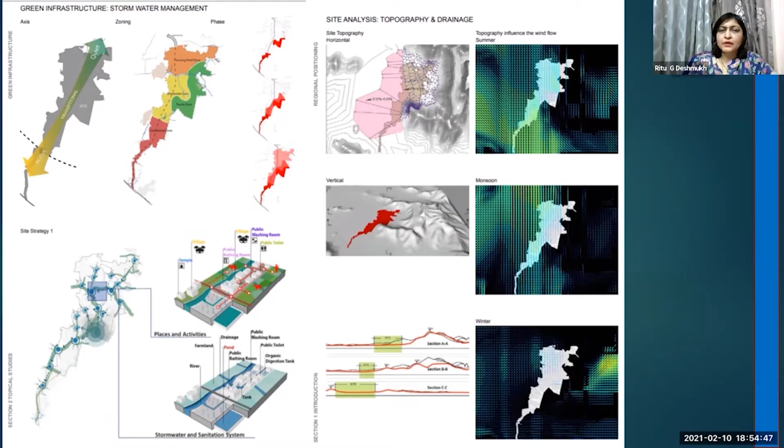The whole approach taken was more about understanding the site, giving sustainable solutions, giving a new kind of language to the built environment that is created. I'm highlighting this because it created a kind of dialogue between what people want and what profitability the builder can achieve, through creating an intermediary approach towards bridging the gap between academia and profession.

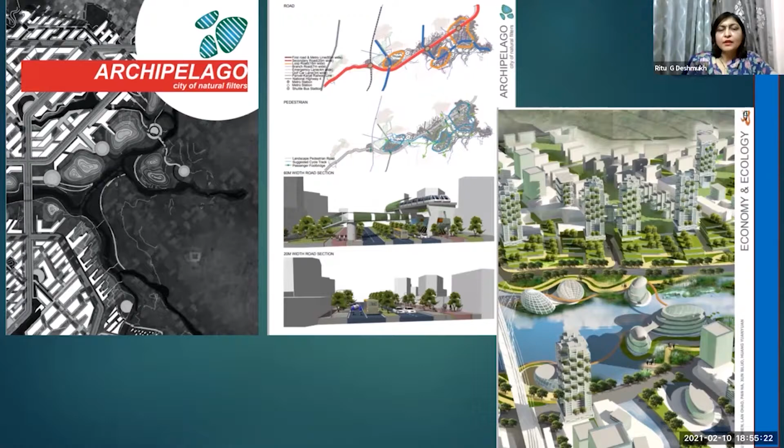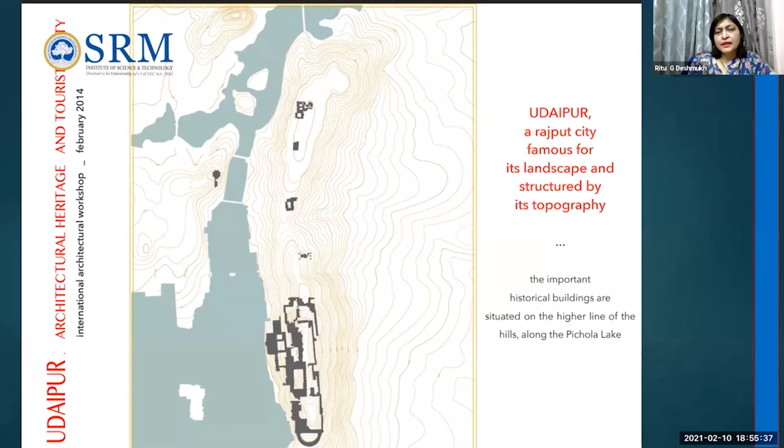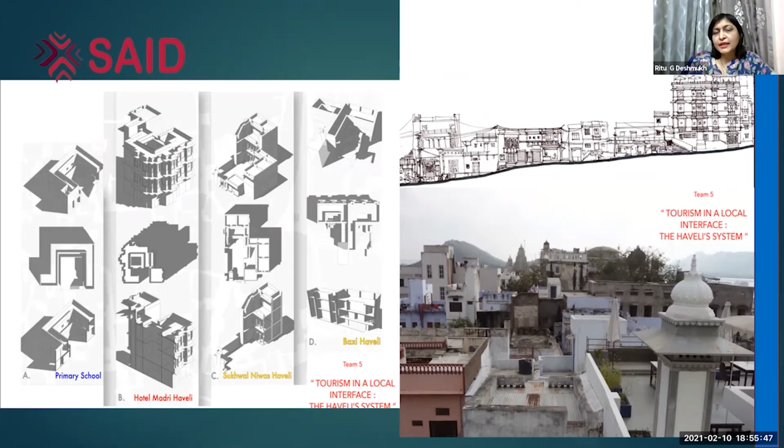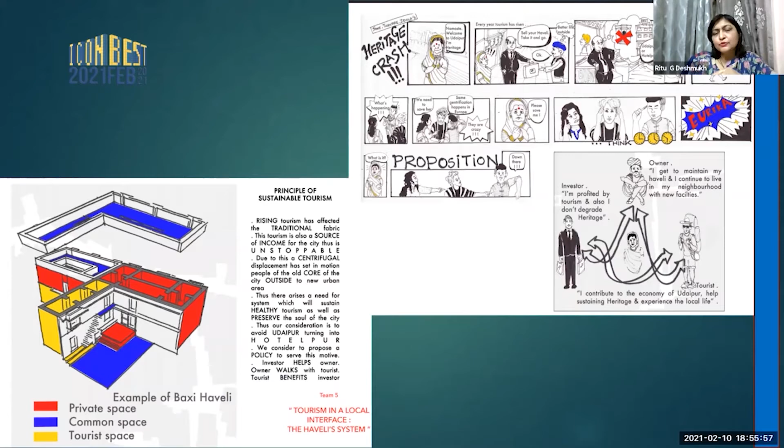The other examples are more academic oriented, but also give certain other solutions. This is a study in Udaipur which we carried out, which has hundreds of years of history. We tried to address two issues here. One was tourism in a local interface - how do you create possibilities of tourism in the old area of Udaipur, which does not have many tourists coming in, since tourists basically concentrate on the historic or monumental structures.

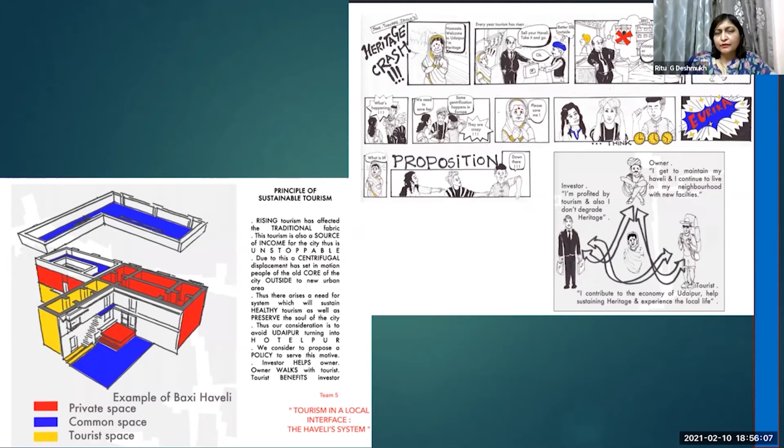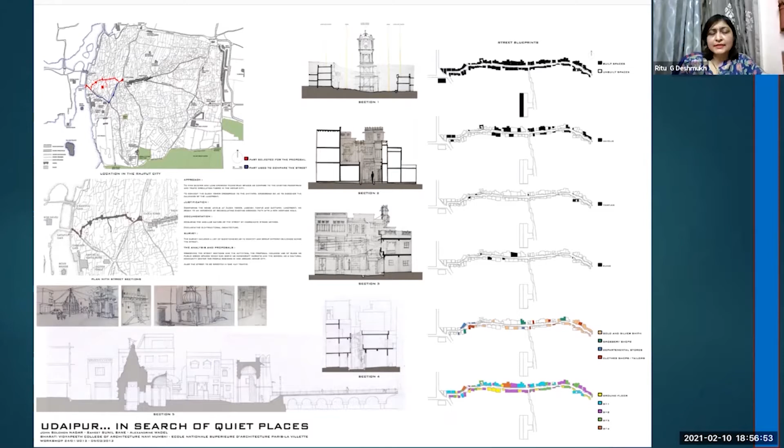So this was an attempt to make a dent into that aspect. The other effort we took was to curate heritage walks or touristic walks aligned to particular issues. For example, this particular walk is about searching for quiet places in Udaipur. People interested in exploring the old city core can take this walk, with pause areas and elements which are not part of the monumental city. These are all the examples I'm trying to show you here.

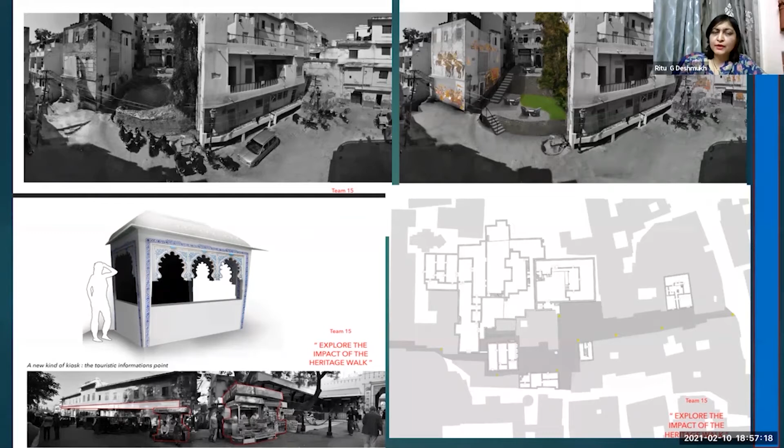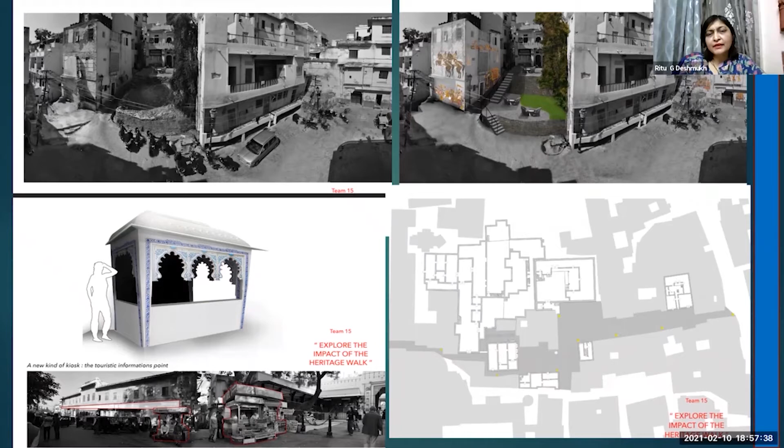This is the kind of intervention the students had proposed. You can see it's a very minimal approach to making a difference to the habitable space of the people there. The idea was to sensitize students to understand that inclusivity or sustainability is not achieved only by demolishing and building new. You can also do this through an inclusive approach of understanding what the people there want, and giving an intervention which helps their habitable space and improves their quality of life.

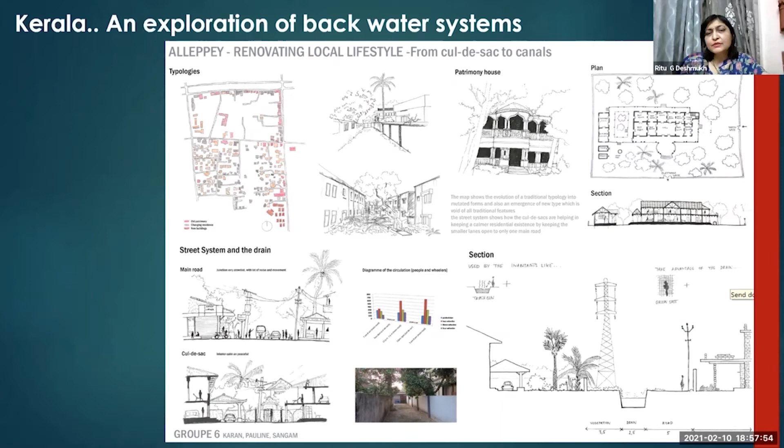Now, this is another example from Kerala, the city of Alleppey, best known as the backwater city. Here we were trying to understand the backwater systems, and we were trying to compare this particular backwater system to Quilon or Kollam, which has lost its backwater system.

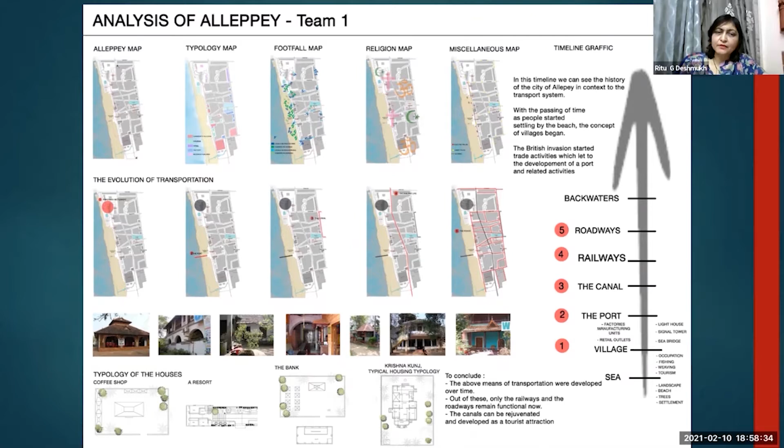There was a thought, when we had gone to this place from the government side, to connect Alleppey with Kollam through backwaters. So that was something we were trying to explore—to understand this backwater system, what is happening to the people living along it, and what changes they are facing. This is again part of learning from Indian cities and exploring new landscapes and engagements, coming up with solutions that are very nominal but make a lot of difference to the people out there.

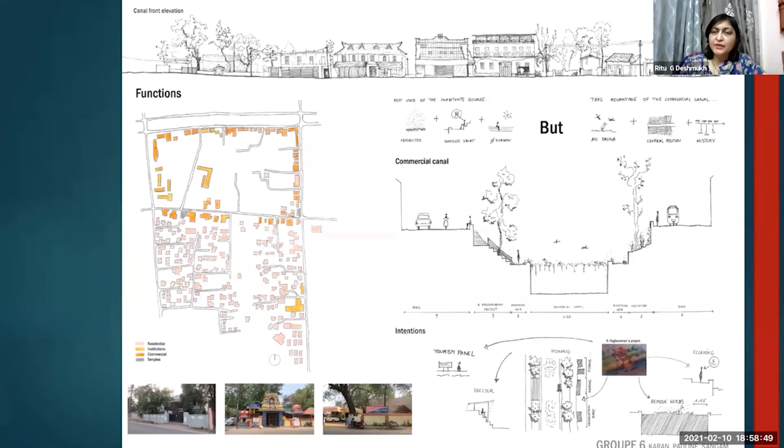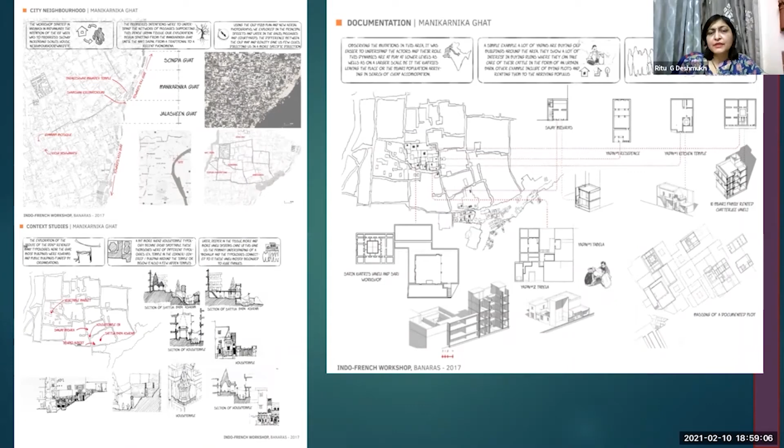So these are some of the solutions which were given. This is the third city I am sharing with you, which has a historical background—Banaras. Here we had done the study of the ghats, the neighborhoods, and the crafts or skills of this old city of Banaras.

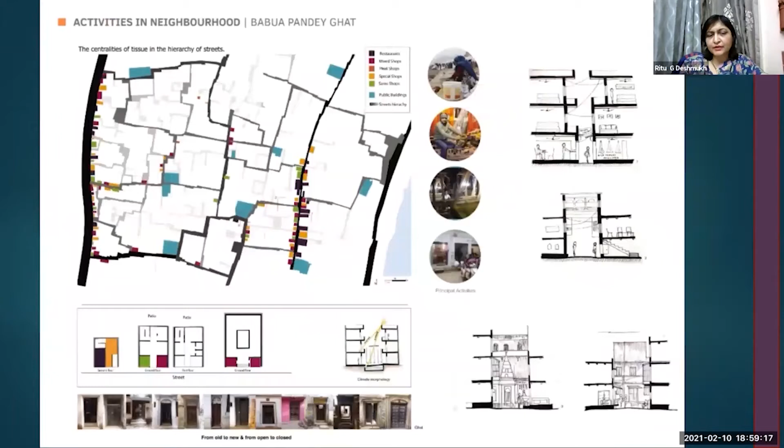As you are aware, it is also declared as a smart city. So now this aspect of people and the kind of engagements they are currently having is sort of kept aside, and there is an overlaying of smart city concepts on the traditional city. So there is a huge confusion and a huge gap about what is the sustainable solution to this, what kind of inclusiveness we are looking at when imposing such ideas onto our built environment. Can there be a way of being sensitive to the requirements of the people?

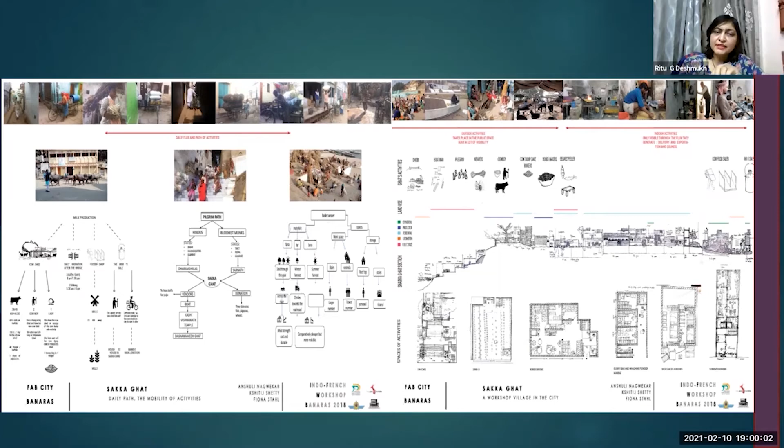Just one example I would like to share is the aspect of tourism. You might be aware that Banaras is very renowned for religious tourism, especially on the ghats of Banaras and the Kashi Vishwanath temple, which has a huge history. This is part of the reason why Banaras is known for what it is.

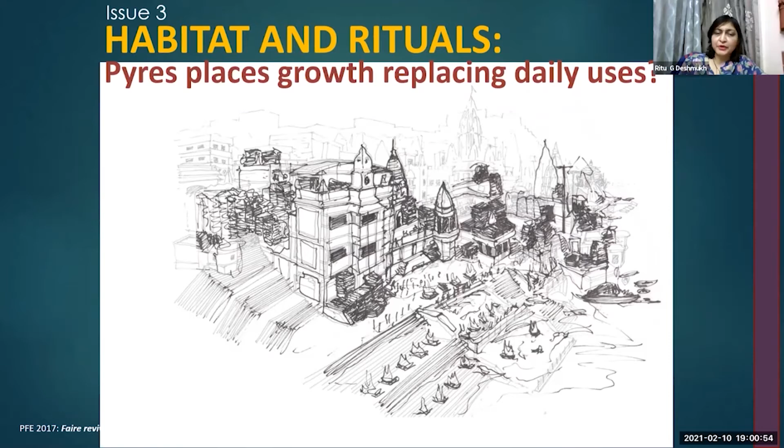The second thing why people come there is for moksha. It is believed that they will achieve moksha if they are cremated at the Manikarnika Ghat, the 24-hour burning ghat in Banaras. The third reason why tourists come is the water body, the Ganges, which is considered very sacred and revered in our mythology and religion.

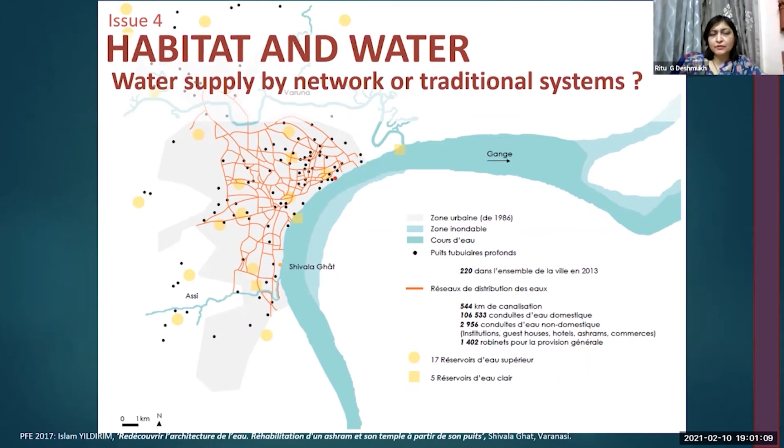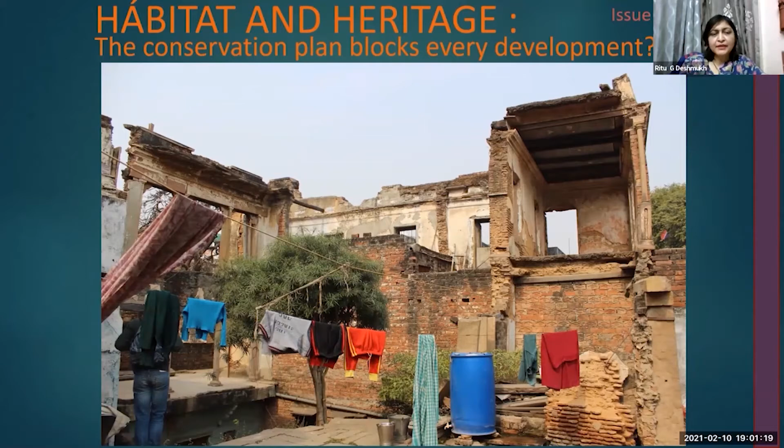This is the condition of the heritage there currently, which is not well kept or maintained, which has a lot to offer, but we are currently engaging in activities like smart city—technology-driven solutions to human habitation. This is one example of what happens because of proposals given by the government without understanding the desires and aspirations of the people.

So these are the things being proposed—removal of the dhobi ghats and the cows from the city. What impact will this have on this particular area? All that has to be understood. That is what inclusivity means—that you are not throwing off things which you think are redundant or an eyesore, or which you think will not cater to the tourist population.

This is something many foreign tourists have shared with us—that they enjoy the way Banaras is currently, and they enjoy the way the cows are part of the ecosystem, part of the city, part of the way of life of people. They also enjoy the way the dhobis use the water bodies around and create activities around the river Ganges.

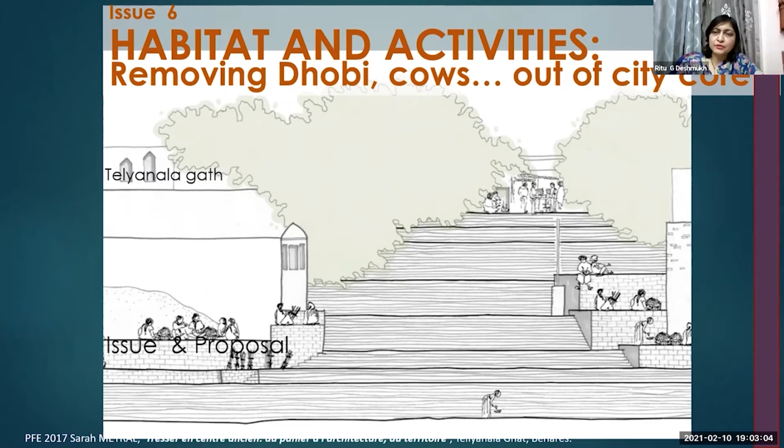Of course, when you propose certain changes, there are pros and cons. So whatever you propose has to be in sync with what is sustainable. You could always give solutions that are conducive to including these marginal sectors as well. So here I would like to share with you certain proposals which have been given by the students.

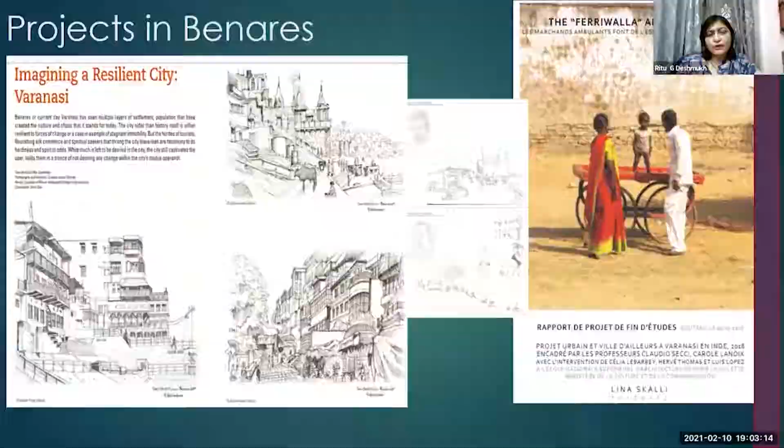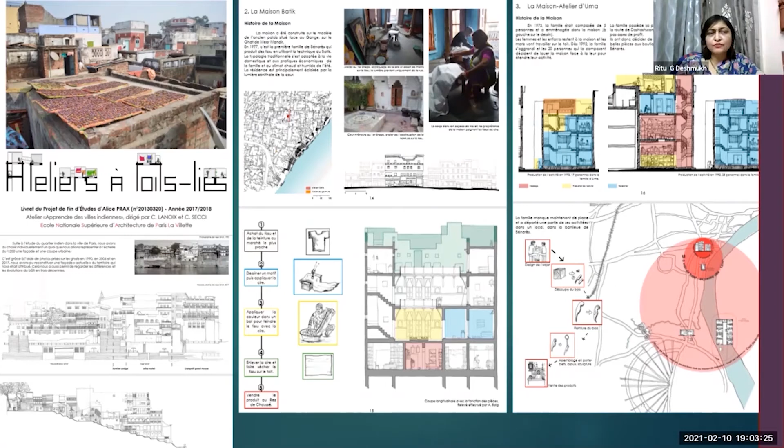So this is one of the proposals which is linking the terraces and promoting the skills of Banaras. This was a very nominal proposal, but it makes a lot of difference to the people out there because they don't have the opportunity to shift from this area to another. They will be part of this old area and sustain in the occupation and habitable spaces where they are living today.

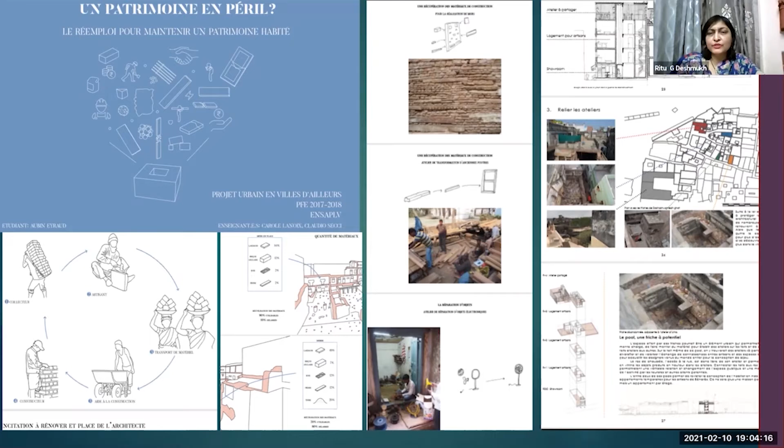The second solution or idea was, as I showed earlier, examples of how heritage structures are dilapidated due to loss of maintenance or nobody to take care of them. So there is a proposal by a student of recycling these heritage materials and creating a pool of materials which can be reused in the old city itself. These are again ideas which can be implemented.

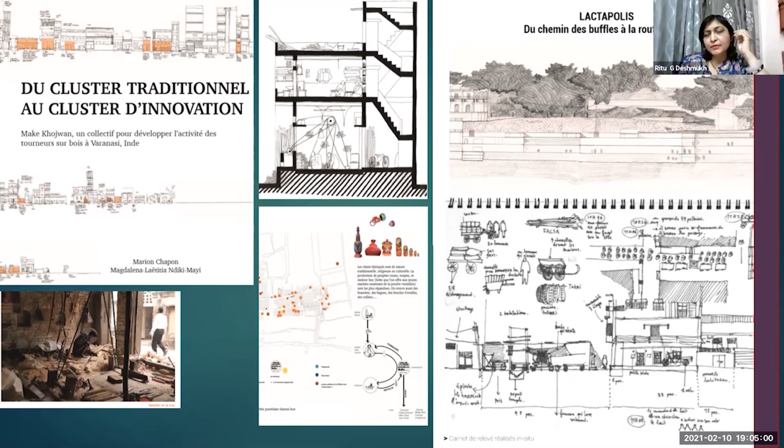There is another idea about the cows and the milk produced from them, because Banaras is known as the milk city. As I mentioned, there was a proposal that the cows have to be shifted outside the city, but when you do this, you are basically removing the essence of the city. So this was a proposal by students as to how the cows can be part of the city, but not disturb or hamper the touristic value of the city, and still produce milk and milk products for the city continually.

So all these are examples which we have been trying to inculcate in students, bringing out the idea that people and place are equally important, and this idea of sustainability is also related to including people and understanding their value systems, beliefs, and aspirations, rather than putting a blanket idea as architects of how we envisage the place to be.

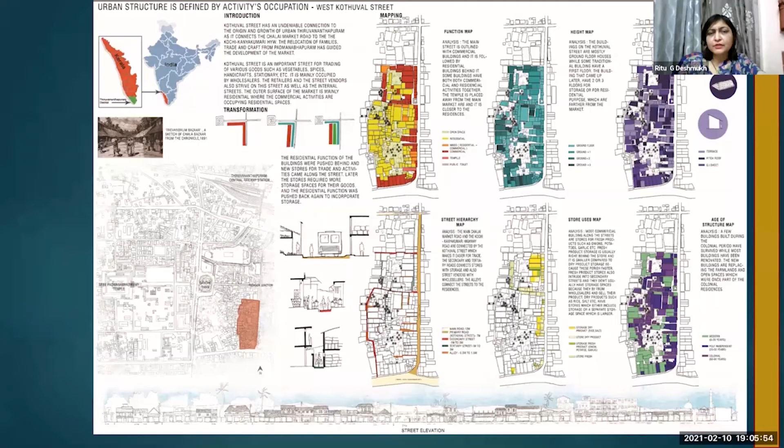So this is another example of a study we had done in Chalai Bazar, in Trivandrum, wherein we were studying the Chalai market. After doing the study, we tried to come up with certain solutions for this market. These are the kind of interventions students did on site to include the people who were doing multiple activities in the market.

These are the kind of engagements we try to inculcate in students to create this terminology of inclusiveness. There was a choreographer from France who collaborated with a Kalaripayattu dancer from Kerala, and in the Chalai Bazaar space where students were putting these interventions, they came up with a performance so that there is a link between the arts and the architecture part of it. I will just quickly move to the next part.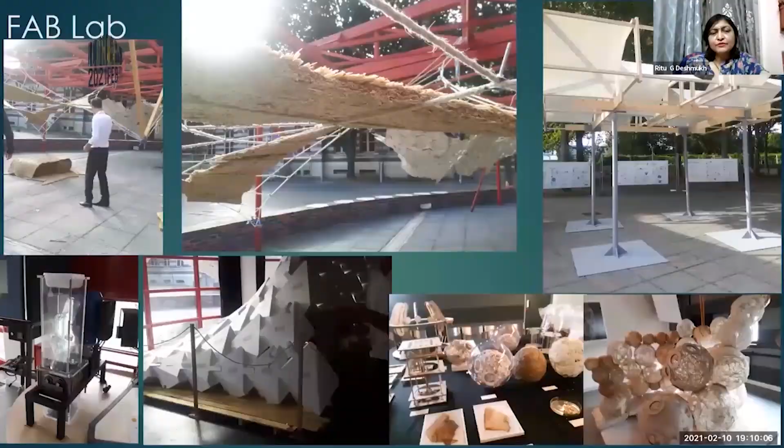So this is another example, Fab Lab Paris, which is trying to reuse materials like plastic reuse and particle board reuse, and they are trying to use this in the public domain. All of these are examples of initiatives done to make inclusivity a part of the growth of the city, part of the sustainable built environment.

So these are the kind of interventions which are done, like the organic farming center, and then there are these 3D models for various areas created to experiment with what people will respond to and the nature of the material, how it will respond to various conditions of temperature, climate, weight, and all of those things.

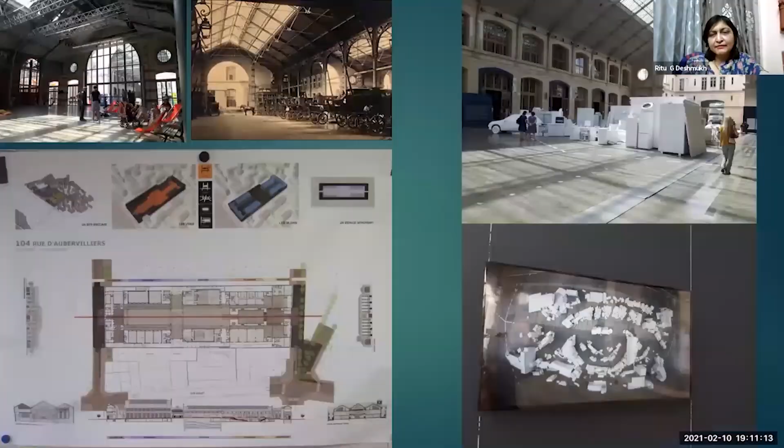Now, this is another example, a building called 104. It was an old warehouse and it has been transformed into a kind of public space. There are a lot of activities happening in this place, and there is no charge to come to this place, so you can do multiple activities in this space, and this center has become vibrant and part of the way of life of people around. It's become a kind of community center for people.

So these are initiatives, learning from which we try, as an academic institution, to include such activities in our pedagogy.

So we tried this particular thing of collaborating with traditional artisans and trying to make it a part of our curriculum, wherein our students go and engage in designing and redoing a public space or a school or a small garden for the people.

So this is what we are trying to say about how the pedagogy can be changed, and this learning by doing can be a part of the curriculum.

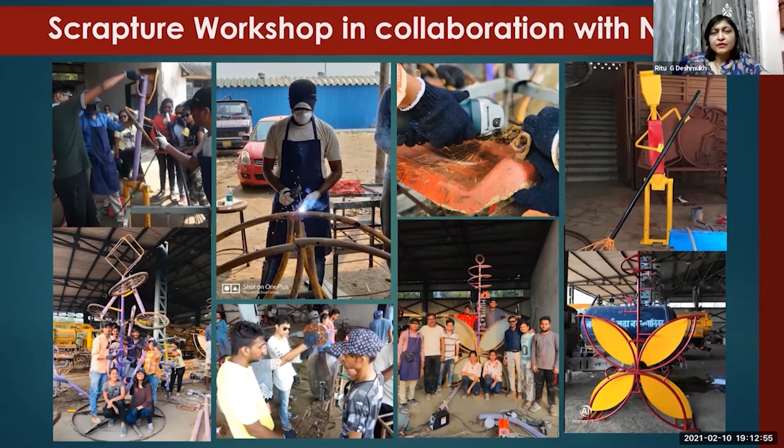This is another exercise that we had undertaken to include the scrap waste which was there by hordes, by kilos, with the Navi Mumbai Municipal Corporation. They invited us to produce 4 or 5 such installations using the waste scrap, and two of these have been installed in the public realm in Navi Mumbai.

We also tried to include case-based learning with a lot of experts of different fields coming together to develop or sensitize the students to develop a thinking into sustainable practices.

Now, this is the initiative which I would just like to explain a bit more, a collaboration we had done with experts, a vertical studio we had done, which had experts from the government, NGOs, the practicing architects, and academic faculty and students in one group.

They were addressing 4 different ideas. We had an expert related to dry waste management, an expert related to mangroves and how we can redesign the mangroves for the people, and then we had the Smart Commute Foundation joining us for a sustainable transport solution in Navi Mumbai.

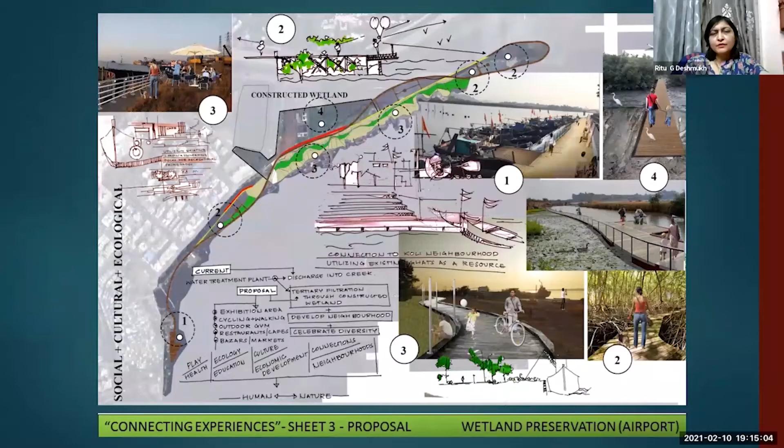What is achieved out of this? It creates learning from existing or age-old knowledge systems. It encourages team building and interpersonal skills. It changes the perspective of pedagogy of architectural education. It grooms you into a global professional and empowers learning globally. And the most important thing is that you go beyond textbook learning.

All this builds up your personality as an architect, and you try to become more sensitive to the environment around you, and the way you address the built environment is going to change. So this is the kind of pedagogical approach that I would like to introduce and propagate through academic institutions.

Now, just to end the whole dialogue with a rhetoric or some questions - why do architects always have to build? Can we not plug into societal needs and cater to an architecture of necessity? Today, architectural profession is mostly catering to the elite or select few, and we are not addressing the bigger societal issues.

So inclusiveness and dignity for all can be achieved by doing ground study of the context and then responding to the development of the projects. So now we should shift our focus from making buildings to creating opportunities for impacting society.

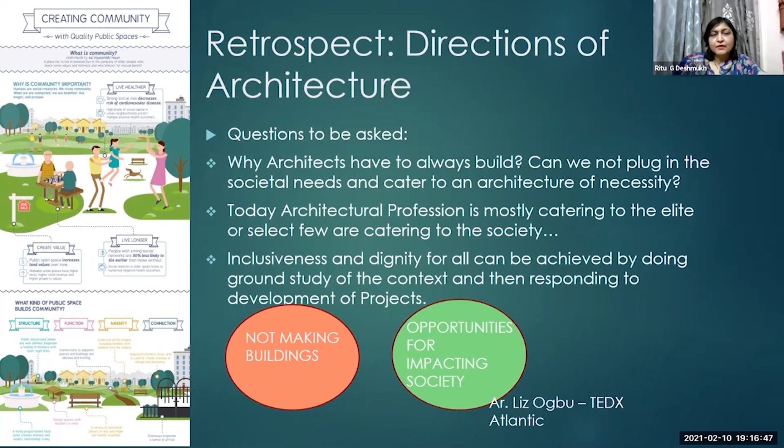So that would be my last sentence to the audience - be the change you wish to see around you. That is what Mahatma Gandhi has said and done. We should also think about creating such change around us, creating an inclusive and sustainable built environment for ourselves and our future generations. Post this pandemic situation, I think it is very imperative that we do it as soon and as fast as possible.

To combat all these issues, we are introducing Bondtite Pro. Bondtite Pro is a high-performance two-component multi-use new generation epoxy adhesive system with room temperature curing. It has very high impact strength, excellent shear strength, better UV resistance, better coverage, and so much more. It is to be used for bonding various similar and dissimilar materials such as metals, ceramics, wood, leather, rubber, marble, glass, and a lot of other materials.

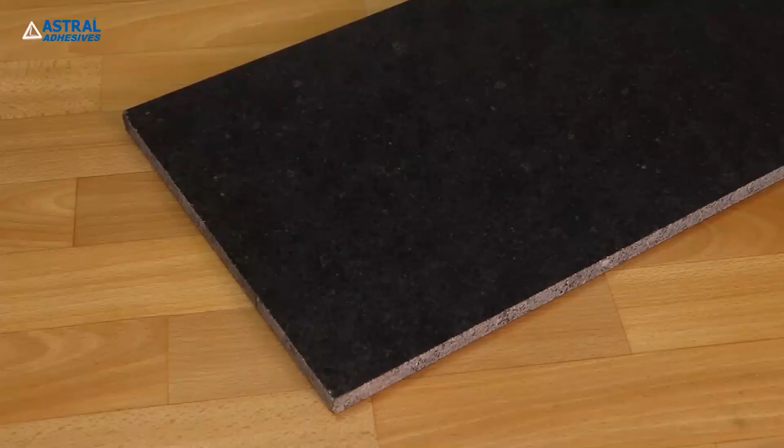Bondtite Pro is very easy to use. The directions to use are really simple. Step 1: Clean the surface and make sure it is free of dust, unsound material, loose plaster, oil, paint, grease, algae, and corrosion deposits.

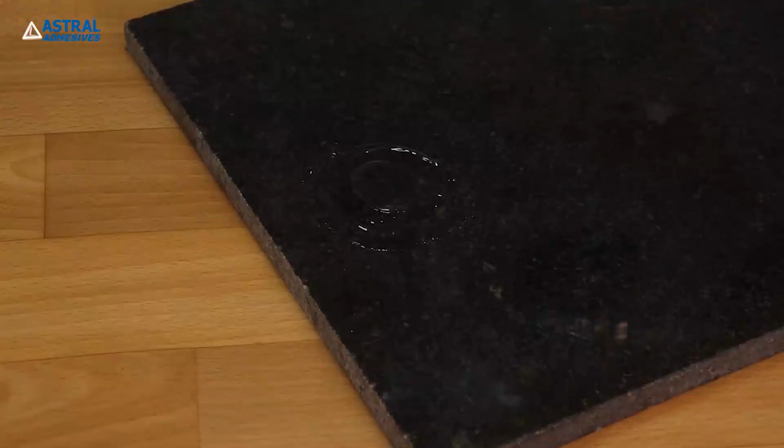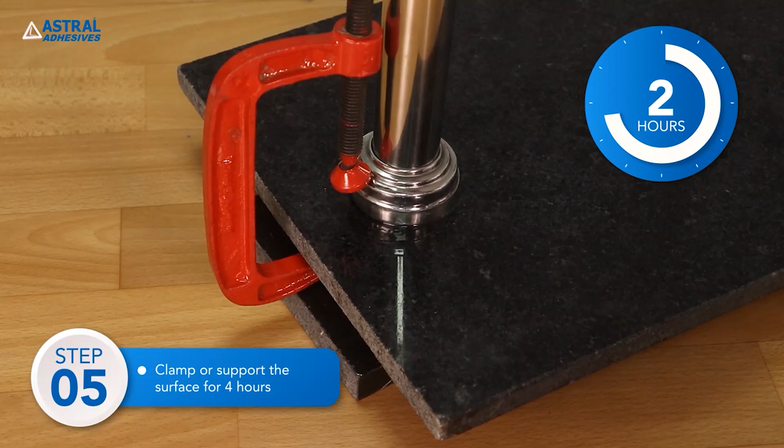Step 2: Take equal quantity of part A and part B. Step 3: Mix it for 1 minute with the help of Bondtite applicator to attain uniform color. Step 4: Apply on the surface. Step 5: Clamp or support the surface for 4 hours. It will attain full strength in 24 hours.